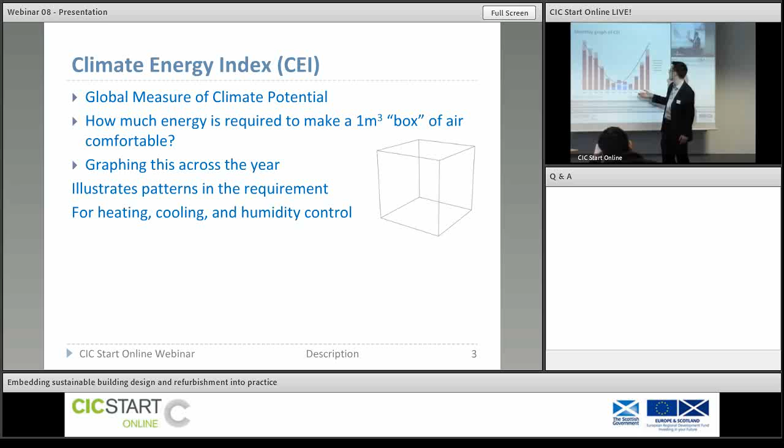This is purely climate based—there's no reference to a building at the moment. It's just an idea of the likely energy usage of a given climate.

So I mentioned at the start that the calculation is based on how much energy is required to make that one meter cubed box of air comfortable. In order to quantify that, we needed to define a comfort zone, which we worked with as an area defined on a psychrometric chart, bound by a PMV of plus or minus 0.5, a relative humidity of no greater than 70%, and a moisture content of no less than 0.004 kilograms per kilogram.

Essentially, what we do is for each location that you want to devise the climate energy index for, the annual weather file for that location is taken, and on an hourly basis, based on the air temperature and moisture content of the air, we can calculate how much energy is required to maintain that air inside this comfort zone.

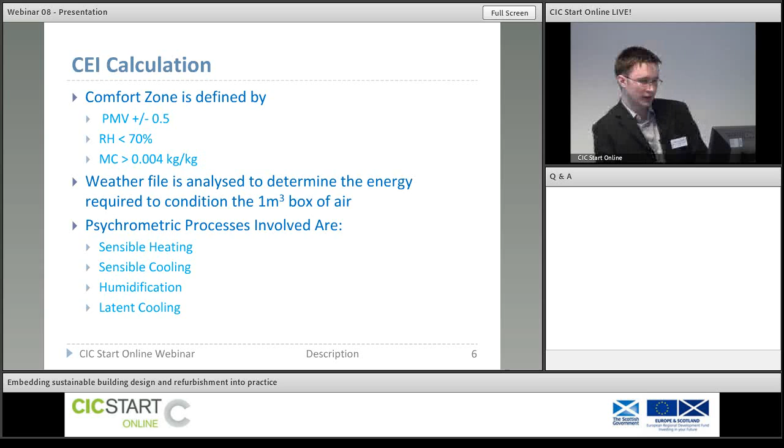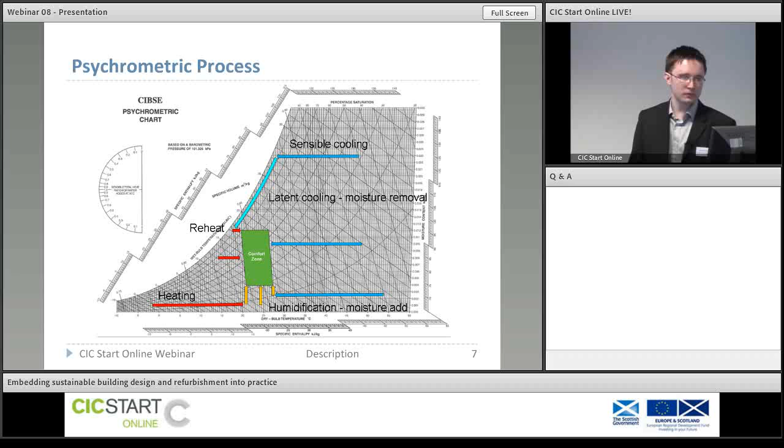So viewing that on a psychrometric chart, you see the comfort zone is indicated in green, and the different psychrometric processes involved are illustrated there. When the air temperature is too high, we need sensible cooling. If it's too humid, we have latent cooling. So basically, you can visualize all these processes on a psychrometric chart.

Once you've created your climate energy index for a given location, you can then compare that across a series of locations around the world, so you can really see where your location sits in relation to other locations. It basically gives you an idea of the climatic burden. We know all climates aren't equal - there'll be far more energy usage in a building built in Alaska than a building built in, say, Los Angeles.

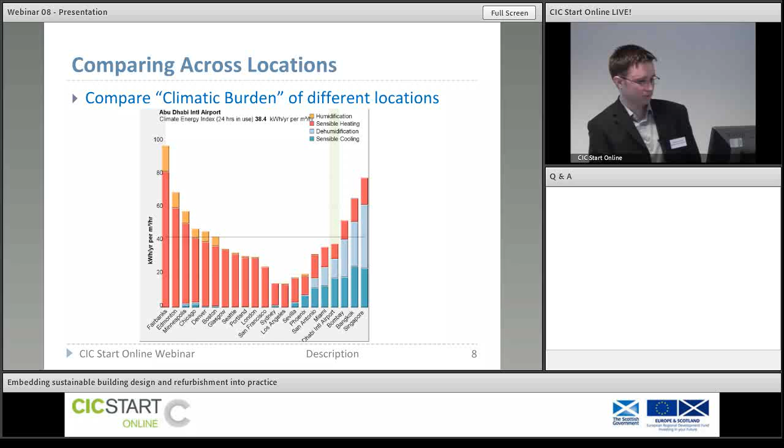Working in tandem with this climate energy index, we have the building energy index, which effectively takes the energy usage from a building that you want to analyze and expresses it in the same units as the climate energy index. So this allows you to really benchmark your building in the context of climate.

As I said earlier, all climates aren't equal. So if you want to look at an energy efficient building performing in a cold location versus one performing in a more temperate location, if you're just comparing kilowatt hours per meter squared against each other, there's no real direct reflection of how the climate impacts on one.

So you might see that the building in the very cold location has higher energy usage, but it could be a much better design - just in reflection to the climate it's placed in, it has much more of a challenge to overcome. So what the building energy index does is it allows us to benchmark that building energy versus the climate energy, so that for buildings around the globe, we have some means of comparing them against each other.

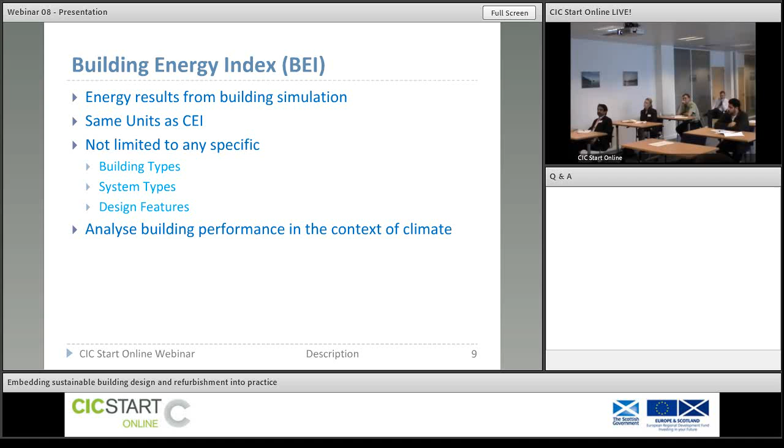Another benefit of the building energy index versus current compliance methodologies - say UK compliance - where there's a rigid protocol laid out for how you have to conduct your energy analysis: you have to use specific profiles, you have to follow certain rules. With the building energy index, it's applicable to any type of building, and your building energy model that you're going to create is going to be as accurate as possible, not tied into a specific methodology.

And from those figures for your building, we extract the energy data, and based on the size of the building and factors such as the occupancy in the building and infiltration rate, we use this to calculate a building energy index expressed in the same units as the climate energy index.

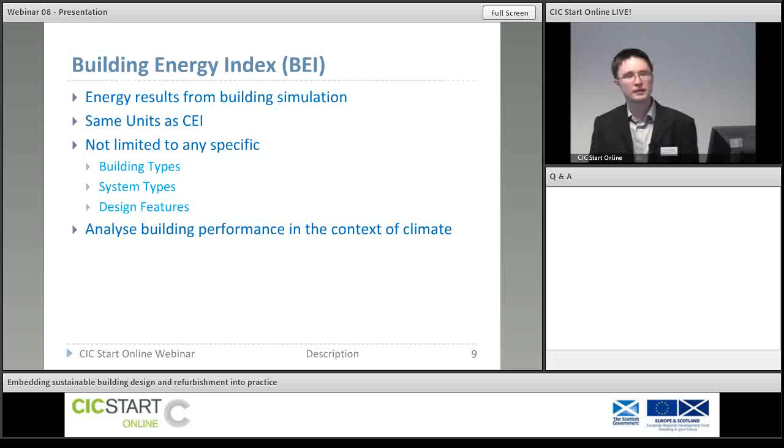I suppose I'll move on now to describe the research we did in-house into the climate energy index and the building energy index. Before we invested a serious amount of time into the concept, we needed to make sure it could stand up. So our research was involved in asking: is the climate energy index really a good predictor of building energy usage?

By the rationale that building energy will vary with climate, we expected to see, if we graph the climate energy index for the same building across a series of locations, the building energy index should follow the exact same trend. If this is the case, it shows us that the climate energy index is a good identifier of potential building energy usage, being that the building energy index is based on actual energy figures taken from a model.

We were also interested to see whether things such as internal gains would distort the comparison between the BEI and the CEI, because the climate energy index is only based on your location and weather data, whereas your building energy index has features associated purely with the building, such as internal gains. So we expected possibly there would be a shift from the most benign locations on the climate energy index towards cooler locations. Some areas that perhaps didn't require cooling under the climate energy index may require cooling once building loads have been taken into account.

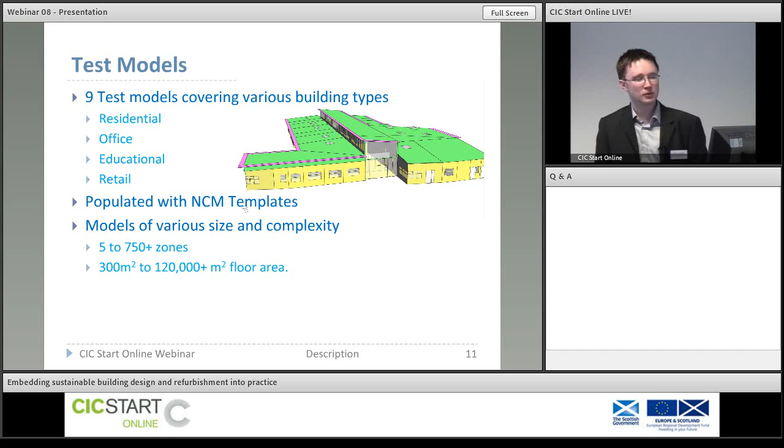As I mentioned, for each of those 9 models we created one reflecting poor design, good design, and great design. The poor standard design was representative of maybe a typical building from 15 to 20 years ago, not one that would pass modern compliance methods in the UK at least. The good design was probably more representative of a typical building passing compliance, and a great building was a best case scenario building with very efficient plants, very tight air tightness, etc.

To achieve these variations in design, we varied the glazing bias on the buildings, edited U values, set different levels of infiltration rates, each building had different internal gains, and system efficiencies were varied across the three design standards.

So for each of those models and design standards, we ran it through the building energy index calculation across 14 different locations in order to cover the complete spectrum of locations around the world. We had cold continental locations such as Fairbanks and Minneapolis, through to more temperate locations, then hot and dry locations, and hot humid locations, in order to identify if there are any particular climates that pose problems to the index, so that we can refine the concept further.

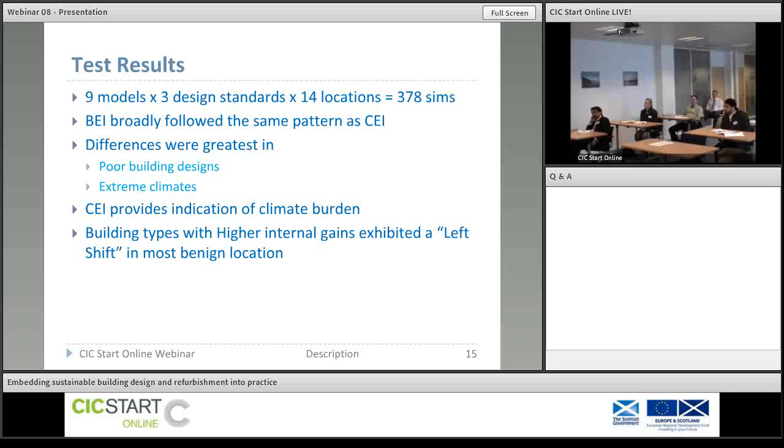The difference, the areas where we experienced the greatest divergence, was in the poor building designs, and also in the more extreme climates, so in the more extreme cold and in the more extreme hot humid locations, we saw the greatest divergence between the BEI and CEI. Whereas for more temperate locations, they tended to correlate much more closely.

Because our BEI results across 378 simulations showed very good correlation with the predicted results from the Climate Energy Index, we took that to say the Climate Energy Index is really giving us a reliable indication of the likely climatic burden on a building.

As expected, one of the goals of the research was to look into whether we'd see a shift from the most benign location given in the Climate Energy Index towards slightly cooler locations. This varied as a function of each building. For more densely occupied buildings with higher internal gains, we saw a definite shift towards cooler locations, whereas within residential spaces there was really no appreciable shift in the most benign location.

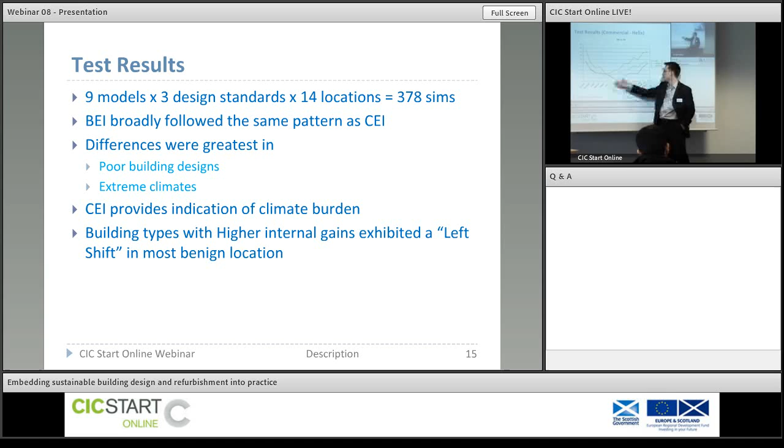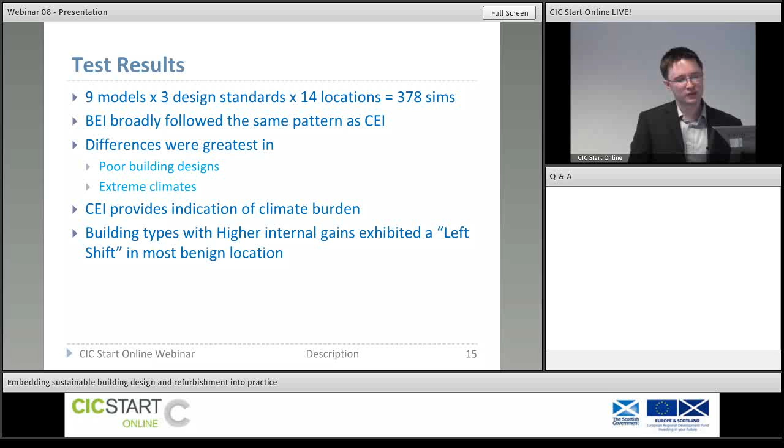Looking at another building type, a commercial office, we do see the left shift. With the Climate Energy Index, the areas with the lowest energy demand were, say, Los Angeles and Sydney. But when we analysed the building energy results, this shifted more towards cooler locations. This was something we anticipated when we started the research, but it's something that can be quantified into the index going forward.

To sum up the results from that part of the analysis, the great designs consistently achieved a better building energy index than the good designs, and the poor designs consistently performed far worse than both the good and great designs. So as an indication of building performance, the BEI achieved what we wanted it to achieve.

We found that the difference between the designs was most pronounced in the colder locations. I'd anticipate this is down to the fact that the poorer designs had higher infiltration rates, and so there was greater heating demand on these buildings, which was exacerbating the difference between the Climate Energy Index and the actual building energy usage.

In order to ensure a useful comparison between the Climate Energy Index and the Building Energy Index, since the Climate Energy Index is calculated for a specific comfort zone, it was necessary to ensure the energy figures coming from the building also corresponded to a comfort zone. So we used a slightly modified version of the Climate Energy Index comfort zone to ensure the results for the Building Energy Index were a valid comparison. They needed to maintain within a similar comfort zone.

What we found with the comfort check was that with poorer designs and more extreme climates, we saw high failure rates in the comfort check. But this was really symptomatic of the comfort check we used, in that CLO values were fixed, and it was difficult to control the mean radiant temperature in the model. So for practical application of the index, there would need to be variation in CLO values and airspeeds to give a more realistic assessment of comfort in the space, instead of a rigidly fixed band as in our assessment.

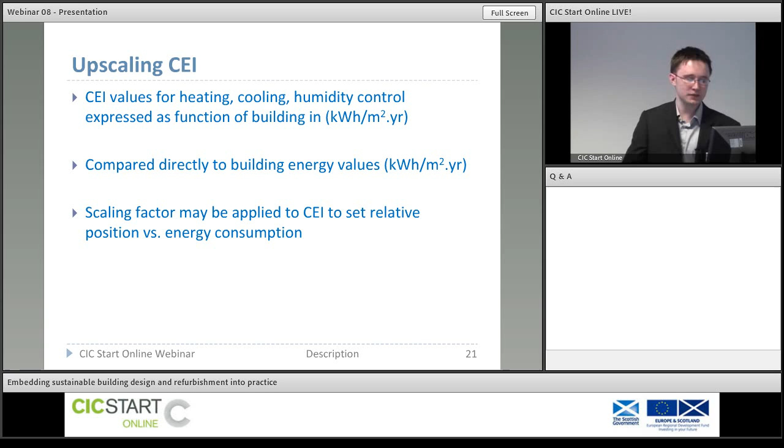Looking at a residential building, though, that same difference isn't seen as much, and they both tend to favour the same locations.

Even looking at a large retail space, again, that left shift wasn't quite as apparent.

Moving back to that slide again, for locations such as Bangkok and Singapore, you notice the blue line there, which is this modified climate energy index, tends to rise further because that's the more psychrometrically accurate calculation, whereas our building energy figures used a more simplified calculation. That's why in those hot, humid locations we don't see the lines following the same pattern.

That's me finished for my section.

I will now present our own work, Glasgow Caledonian's work, to independently verify what IES had found in terms of the usability of BEI and CEI. I'll say something about what we found and perhaps some direction for further work.

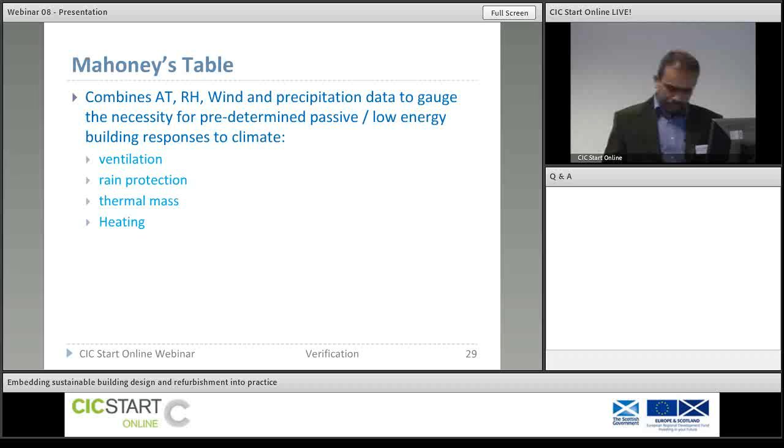Mahoney's table would look something like this. We made a simple Excel chart out of this by entering the climatic data and looking at what needs to be done in terms of the four variables. We could then begin to select some indices that need to be fulfilled in the building. For those who would like more details, we could show this later on. But I would just want to say that the indices Mahoney used, or the early attempts used, are not exactly the same as what CEI is doing.

CEI is almost exclusively on the energy. As Darragh said, it's the amount of energy that is needed to condition this given mass of air. So it cannot be directly compared. So we need to modify it.

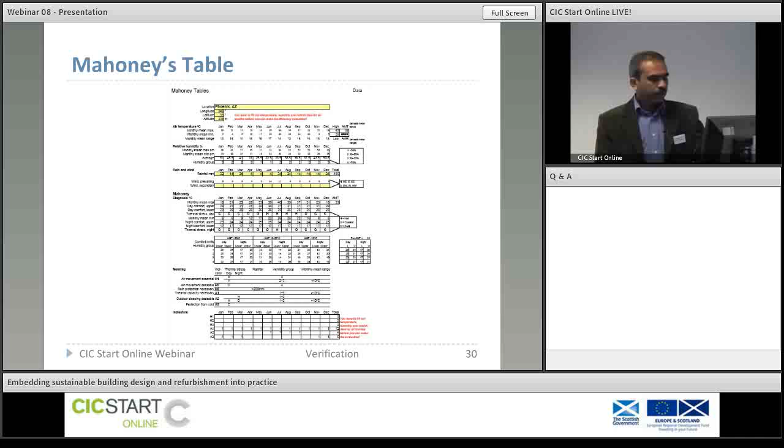The modification that we did was, if you recall the indices that we had before, at the bottom of this chart, the indices that Mahoney had. What I'm trying to do here is to weight it according to their importance. These are the 6 indices Mahoney had: 3 indices on ventilation and rain, and 3 indices on thermal mass and heating.

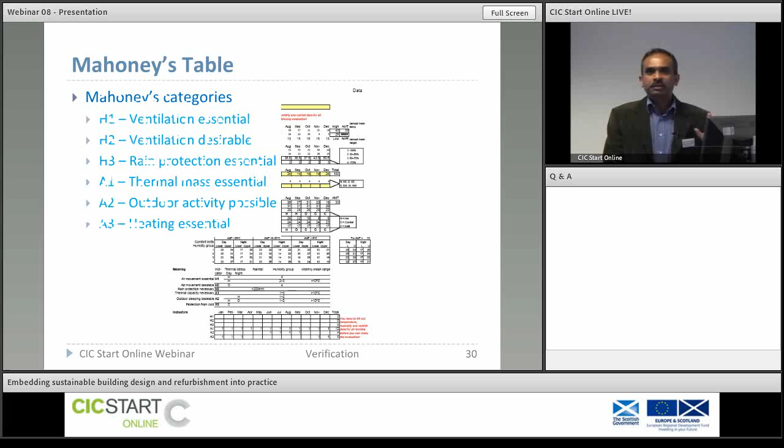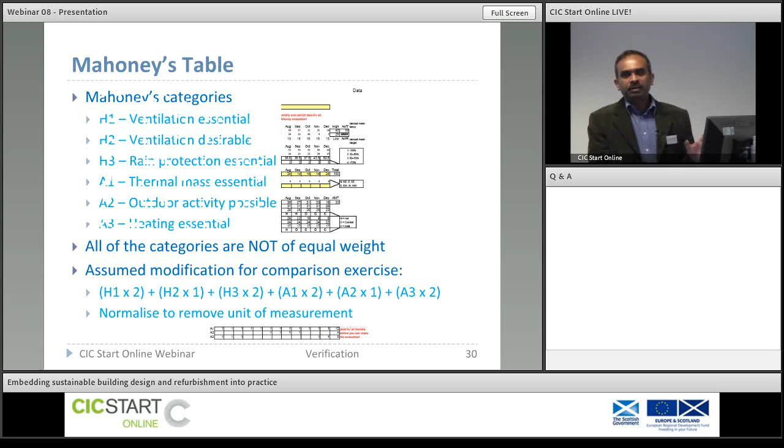I then began to weight it depending on how important this is. This is a subjective exercise, but it recognizes the fact not all indices are equal. So, on that basis, the formula at the bottom is the attempted modified Mahoney's index. In other words, we are trying to equate, as much as we can, these 6 variables, which are some thermal, some heating, others ventilation, and so forth. I hope you see the logic in there.

Perhaps the reason why this improves has to do with the difference in climatic burden caused by sensible energy and latent energy. Perhaps that is the reason. And what I meant by that previous slide is to look at what is going on with Phoenix's climate.

Here is Phoenix's climate plotted on a bioclimatic chart, developed by Givoni in the 60s, '69. Each line here represents a month's data, and the letters represent what needs to be done to make this climate comfortable. DH, for example, is dehumidification, V is ventilation, and so forth. H is heating, IG is internal gain, and so on, up on the left side of the graph.

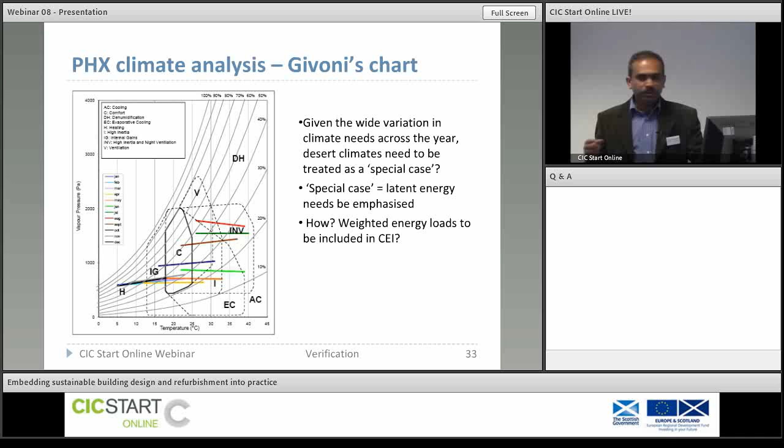As you can see, this is a climate with a wide variation in monthly climatic load. Some months need ventilation, others need very strong heating. So it behaves like a proper temperate climate in certain months; in other months, it is more like a hot dry climate. This is a climate with 50 degrees temperature and 3% humidity. It's extreme. So this perhaps is a special case, and that explains why it was an outlier. When you take it out, the index performs much better.

This compared to 2 regular climates: here is Glasgow - might not feel like a regular climate - and Sydney, traditionally considered a good climate. Even in the case of Glasgow, on the left, you would see all the months have roughly similar load - they all need heating, at some level. For Sydney's case, the humidity levels are relatively constant; the curved lines are the isolines of humidity. So these are climates you could say are more conducive to building design, as opposed to Phoenix, which is an extreme climate.

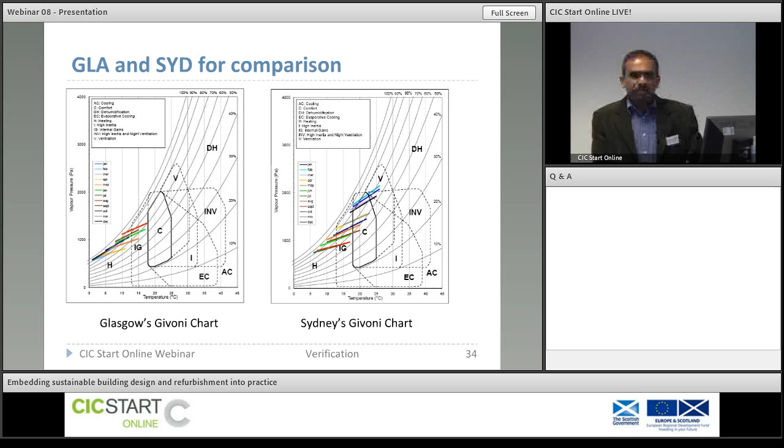And that begins to explain why the index doesn't perform very well in extremes. Perhaps Phoenix shouldn't be there as a building zone.

We then move to looking at BEI itself. As Darragh said before, there are 3 kinds of building they are looking at: poor, good, and great. These are explained before. We tried to look at whether we could explain some of the variations in this, and then compare with a simpler building simulation software, because one of the aims is to see how good the index is.

So we are using some other software, in this case DEROB, to simulate and then say something about improvement. The software we are using is a very simple parametric, very few-zone kind of software called DEROB, originally developed in UT, University of Texas in Austin, and then subsequently developed more with Lund. So using the four input variables - outdoor climate, average cloud cover, and so forth - we take simple information from the climate file and look at the cooling or heating energy needs of the building.

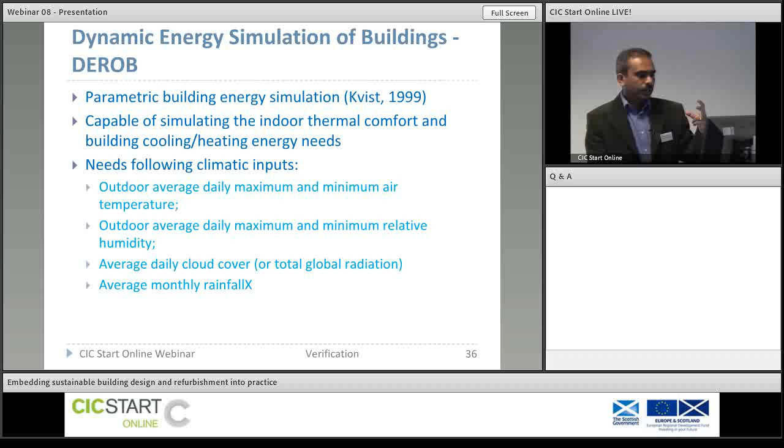Here are some comparisons of BEI results versus the building energy consumptions predicted by Darragh. Poor on the left, great on the right, and below is BEI versus great, but excluding some of the buildings.

The reason we wanted to exclude some of the buildings and combinations: if you recall from Darragh's presentation, there were 378 simulations. Not all of them would actually occur. You wouldn't do the same building that you normally do in Singapore and in Fairbanks, and call it great in both cases. So some combinations will not occur.

So if you attempt to take away some of the outlier combinations that will not occur in reality, the performance improves dramatically. I'm not sure whether you can see the R square at the bottom is 0.8 - that's very good, the correlation between the two. So it's a good predictor of building energy use, especially for great buildings, which means the index is successful. That's what the index tried to do - it wanted to capture good, best-practice buildings, and it does predict it very well.

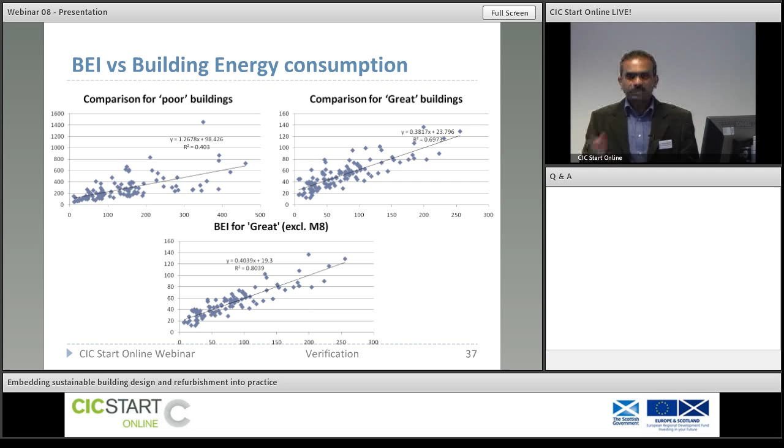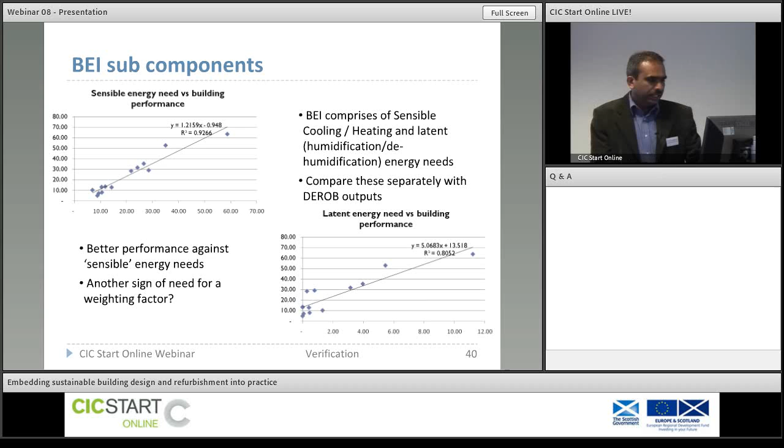So if you look at BEI versus subcomponents - sensible energy need versus latent energy need - on the left we have BEI versus sensible energy, and on the right, BEI versus latent. Reading the R square on the left, for sensible energy it's 0.92, versus latent which is 0.8. So you can see the index predicts the sensible energy need of buildings much better. When I did the comparison, the overall pattern looks similar to what was shown before.

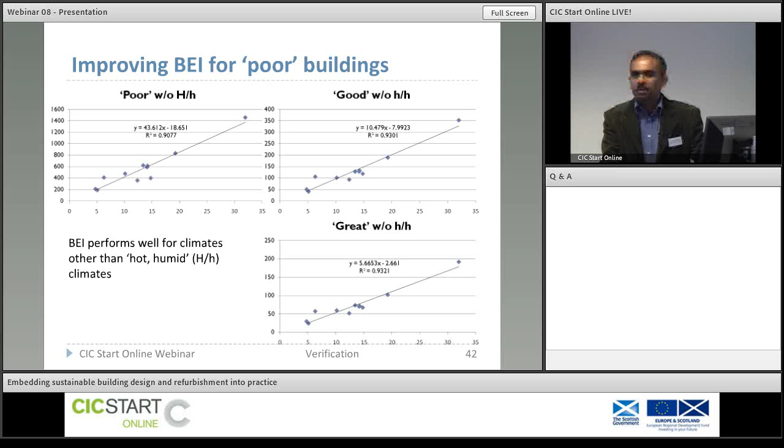So if you then remove the hot, humid climate buildings - that is, buildings in Singapore and Bangkok - from the sample, even poor buildings perform very well. The R square there is 0.9, and for great buildings it's 0.93. So they all perform very well. Perhaps the problem is with hot, humid climate - it was already recognized many years ago that design in hot, humid climates is problematic because of the excessive importance of dehumidification.

So what can we then learn going forward? The index, as I said, is a very good match with previous attempts, so we know that previous attempts worked. This is a good index, a good predictor. The outliers can be explained by looking at the climatic load - the extreme nature of climatic load in, for example, Phoenix. Perhaps the improvement could be to look at weighting sensible load and latent load slightly differently.

Instead, even though they are all energy, perhaps it is better to treat latent as more important in terms of thermal comfort. We have to keep in mind it's also an artifact of the comfort definitions that are universally accepted. For example, we are using PMV. Now we know PMV is not a very good predictor of thermal comfort in hot, humid climates - there are other reasons for it being not so.

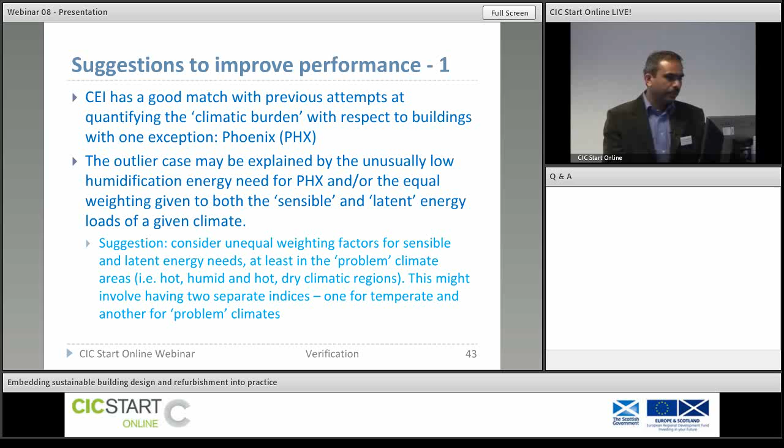In terms of further improvements, it predicts great buildings very well, as I said before, but we perhaps have to also look at poor buildings. Given the universal aspirations of BEI and CEI, we need to look at the performance of poor buildings, because a vast majority of buildings in the world are probably in that category. If you want a quick and easy method to predict their energy needs - ideally they shouldn't be built, but that happens a lot - so in order to predict poor buildings' performance, perhaps we need to look at other ways of weighting it.

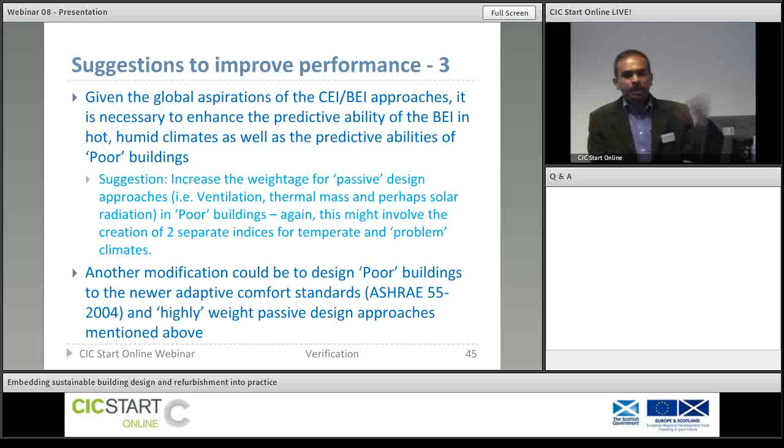One of the suggestions is to somehow weight passive design standards into it—that is, naturally ventilated buildings, especially for hot humid climates—and use them in the weighting system. There are attempts to weight or include naturally ventilated buildings in global thermal comfort standards. For example, there is the adaptive standard, ASHRAE 55/2004, which begins to account for naturally ventilated buildings. Perhaps now we can begin to look at the climatic burden imposed for such buildings by naturally ventilated means. Another approach is to weight the sensible load and latent load differently. I do not know what the different weightage is, but that perhaps is for further work. Thank you very much.